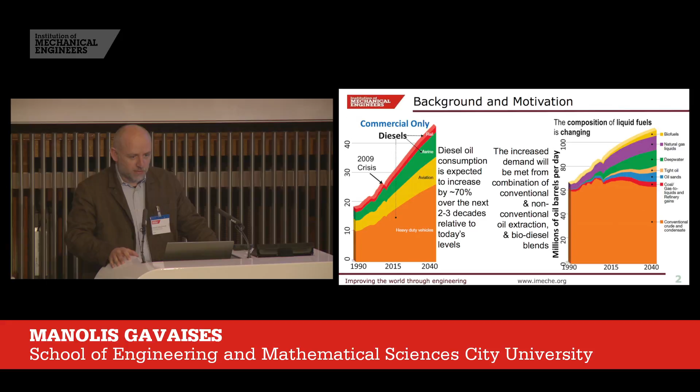Let me start with the motivation of this work, which is part of a greater plan. I guess all of us know that diesel oil consumption in the commercial sector is going to increase a lot over the next two decades. Many forecasts suggest that, and it's already an industrial reality that demand will be met from different oil sources, including conventional but less conventional ones.

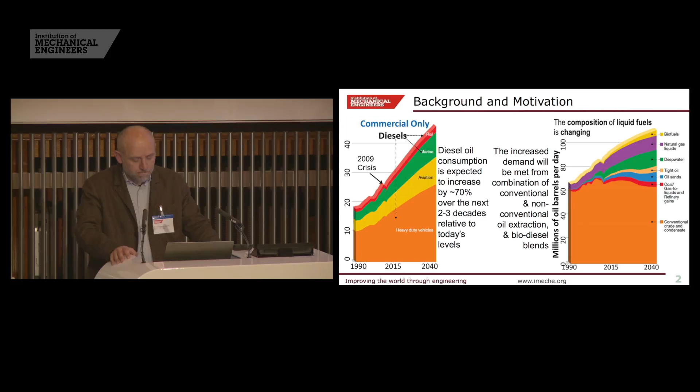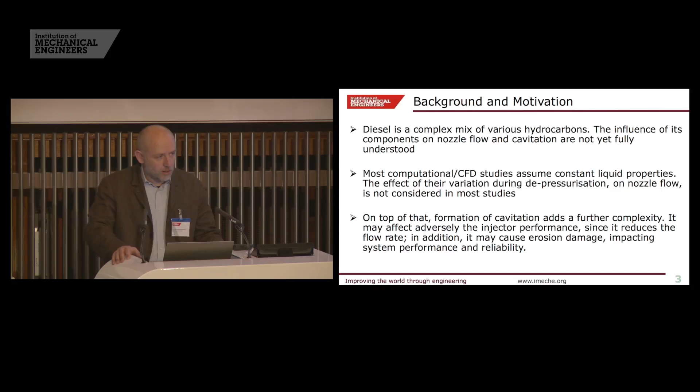That macro trend affects what we do in different ways. If we narrow down first to fuel systems, we know that various properties do affect nozzle flow and cavitation, but the actual influences are not fully understood. And if you narrow further down to computational studies, most of what we have seen so far in the literature refers to simulations where constant properties are frequently utilized without taking into consideration the variation as a function of pressure and temperature during the depressurization of the fuel as you go from the rail to the injector. On top of that, if cavitation is taking place, we know it does have an effect on flow rates and erosion and overall system performance.

So the objectives and aims of the present work are the following. First, to simulate the effect of variable fuel properties on nozzle flow and cavitation as we depressurize the fuel from the rail to the nozzle exit. Second, to investigate how different fuel components cavitate for a range of conditions, pressure and nozzle designs. And once we have quantified those effects, to compare how close or far they are from changes to the nozzle flow that can be induced by simple modifications to the nozzle design, like the tapering of the nozzle or a radius of curvature, things like that.

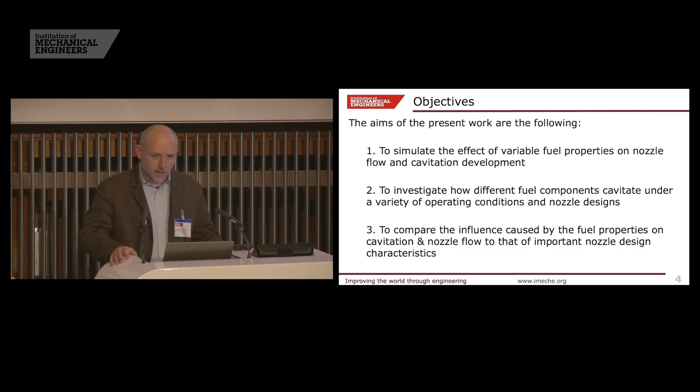This is the structure of the presentation that is going to follow. I'll give an overview of the model we have been using for this study and a description of the nozzle configuration that has been utilized. Then I'll go through the various results, which briefly cover the effect of variable fuel properties for both fixed needle lift and variable needle lift cases. I will show the effect of cavitation and the effect of fuel composition, and at the end I will summarize with concluding remarks.

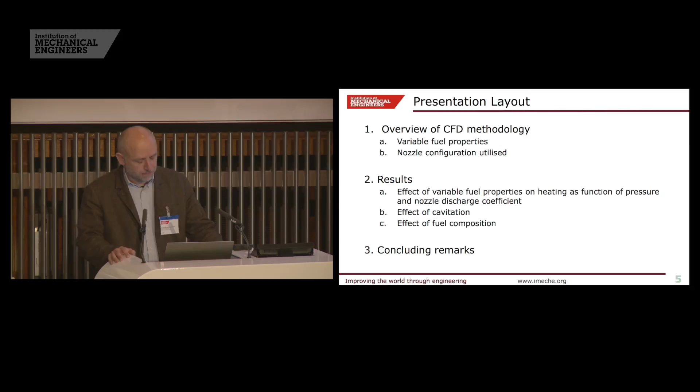I will start with a very brief introduction to the CFD methodology, similar to what my colleague Fivos Koukouvinis presented yesterday. At this stage we decided to keep things relatively simple, and in order to have a first order of magnitude comparison between the different cases, we don't consider it necessary to go to more complex LES or other simulations, so RANS runs have been adequate for this study.

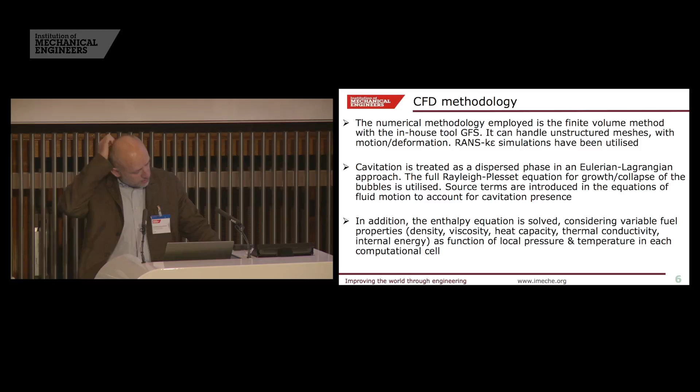Cavitation, as mentioned yesterday, is treated with a Eulerian-Lagrangian approach, where cavitation starts from pre-existing nuclei in the fluid that follow the Rayleigh-Plesset equation, and then we calculate their interaction with the flow using appropriate interaction terms in the solved equations.

In addition to those, which are kind of standard, we have introduced the enthalpy equation, which is fully coupled with the cavitation, and in which we consider variable fuel properties. Density, viscosity, heat capacity, thermal conductivity, and internal energy are all a function of the specific fuels used, and these vary throughout the solution in every single computational mesh cell as we calculate.

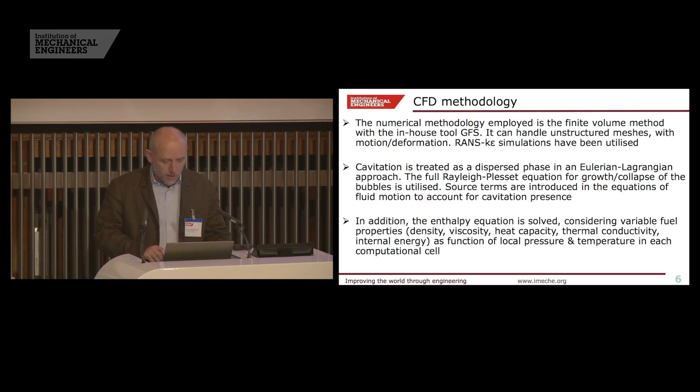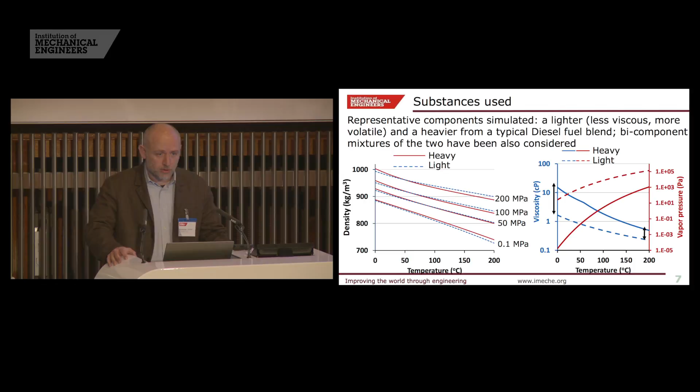In terms of the studies I'm going to present, starting from a typical 6-hole injector, we are simulating only a sector of 60 degrees, applying symmetry boundary conditions, adiabatic walls, a range of injection pressures from 1100 to 3000 bar, a fixed back pressure of 60 bar, and we also fix the fuel inlet and initialization temperatures to 80 degrees for the studies I'm going to present today.

Looking in a bit more detail at the nozzle flow itself, we are using a radius of curvature at the hole inlet, as well as straight holes and some tapering in order to have more or less cavitating flow conditions.

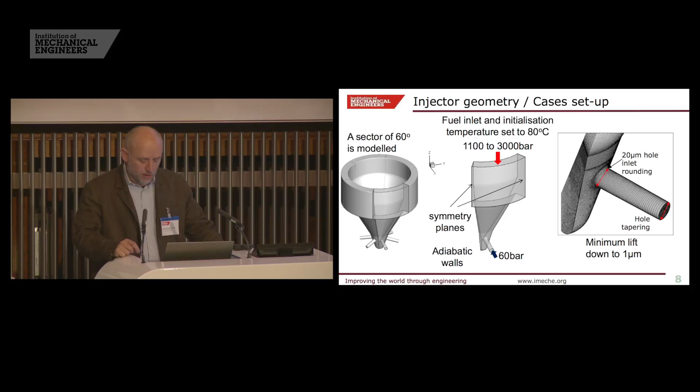I should also mention that during the transient motion of the needle, the minimum lift we applied goes down to 1 micrometer. So before getting into too much detail, that's how it looks. It's a very simple nozzle, nothing exceptional happening, not too complex flow regimes.

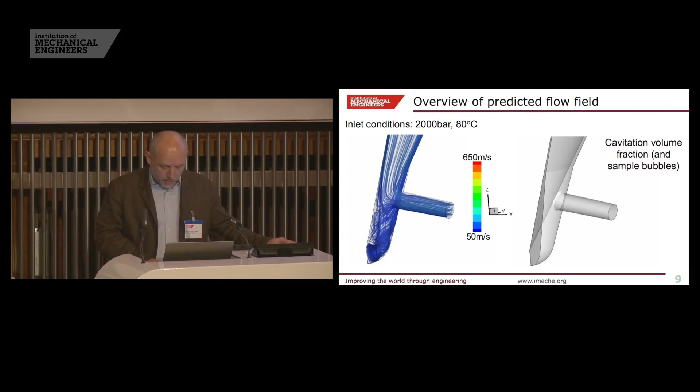The vertical axis is the temperature difference between inlet and exit. As a function of the discharge coefficient, one can calculate by simple zero-dimensional thermodynamic considerations the temperature increase of fuel. One means all pressure is converted to kinetic energy; zero means all pressure is converted to enthalpy, and from the properties you can calculate the corresponding temperature increase. The continuous lines represent simulations from a 0D model, and the superimposed points are from the CFD simulations. So once you have the properties in the solver and calculate friction, the overall heating is what you should expect from theory.

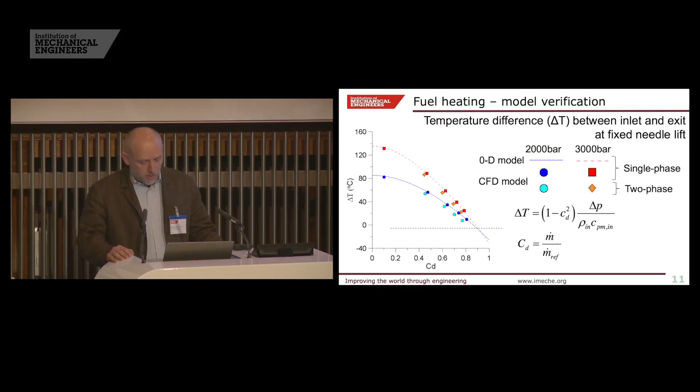Those simulations are initially performed assuming single-phase flow, and if you add cavitation on top of that, we see it does not play a significant role on the heating. You expect some interaction because the flow rate may change, but mainly that effect on heating is small.

Now let's take a step further and see how different fuel components may affect things. What I'm presenting here is the effect on fuel delivery. Starting from that reference case, the blue bars correspond to the light substance, the red to the heavy substance, normalized from 100% which corresponds to fixed properties and single-phase flow.

We know first of all that the difference in viscosity does affect the mass flow rate, and that's because of the difference in viscosity - density is more or less the same, so it's mainly a viscosity effect. Then you can apply the cavitating phase, and you find, as expected, an overall reduction in fuel delivery. All those simulations assume constant properties.

The next complexity is to add variable properties, and here we find a slightly different trend. The light component gives predictions that, relative to the reference case, show a reduction, while the heavy component has a different trend. That's a balance between the variation of density and viscosity across the range of operating pressure. So depending on which component you have, you may find a different variation there.

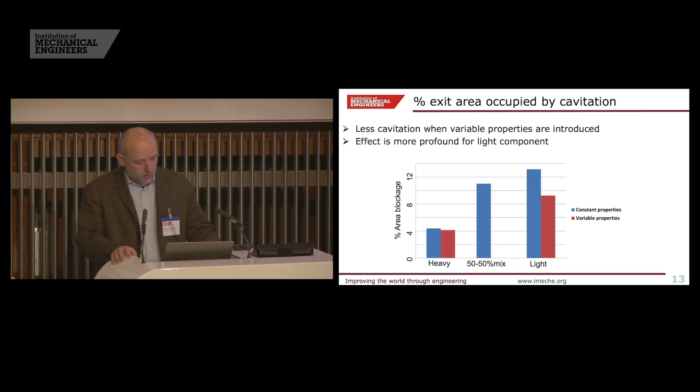Another measure of quantifying the effect of properties on nozzle cavitation is to compare, for the heavy and light fuel - which are to the left and right bars - the area at the nozzle exit occupied by cavitation. I refer to that as blockage. It effectively shows how much of the volume exiting through the nozzle is cavitation. In that case it goes up to 12%, with the remaining 88% being the liquid that comes with it.

If density was constant, that would automatically translate to a corresponding increase in injection velocity. So what we see here is that the effect of properties is more profound on the light components, and in relative terms is less when you consider variable properties.

The previous case I presented referred to fixed needle lift at a given, say, maximum value across the range. Now let's see how things may change with an actual transient needle lift profile, which is what we've assumed for these simulations - an assumption for these cases. It goes from 0 to 1 millisecond.

What I'm presenting with the two different colored lines now is the temperature increase, as I was predicting before for the fixed needle cases, but through the injection event. So the temperature increase of around 20 to 30 degrees at time around 0.8 milliseconds, which is the flat part - the maximum needle lift case - corresponds to what we had before. However, during the opening phase of the needle, we see a disproportionally large increase of fuel heating.

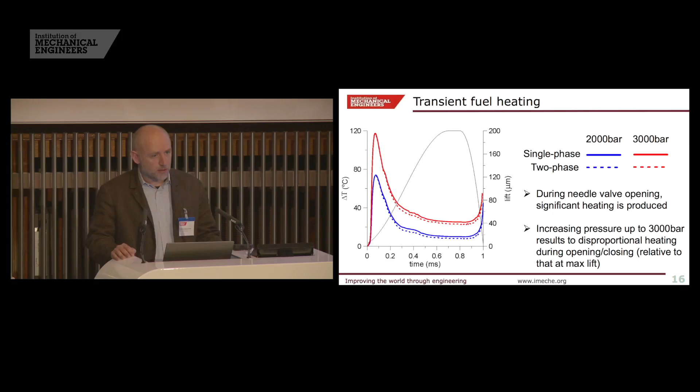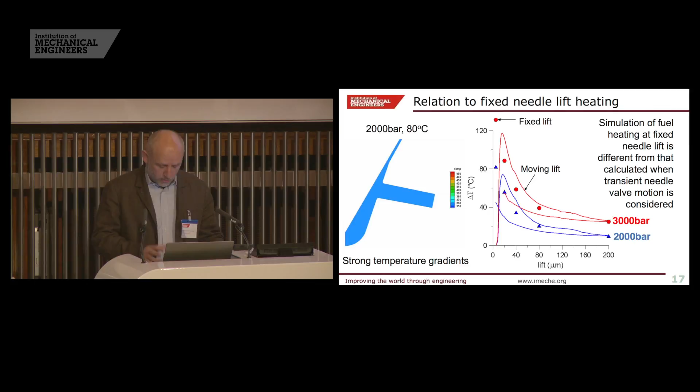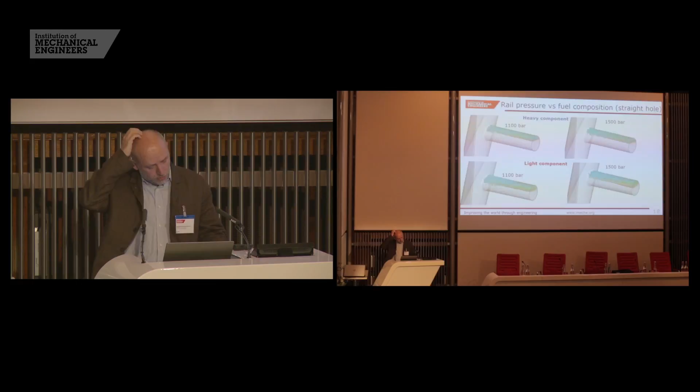Now let's see how different composition may affect the results. I'm using for these simulations some more moderate pressure values for the two different components simulated. If you were fast enough, you'd see that between the light and heavy components, cavitation was starting much faster for the higher pressure case, and going towards this direction was the slower developing one.

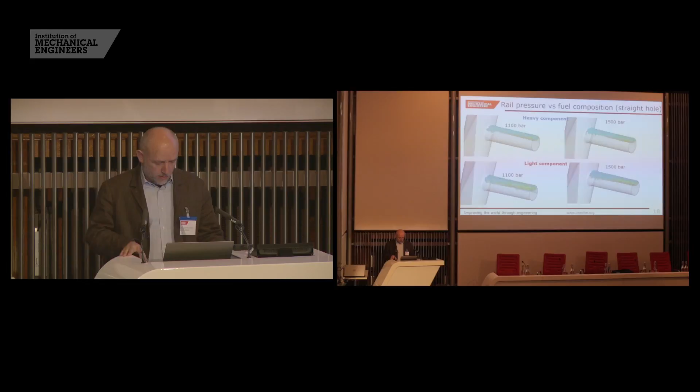So for a given fixed pressure level, 1500 bar or 1100 bar, corresponding to some pilot injection events, you see a difference in the initiation and development of cavitation growth that in relative terms corresponds to a rail pressure difference of 400 bar. You can get the same effect by adding 400 bar of pressure.

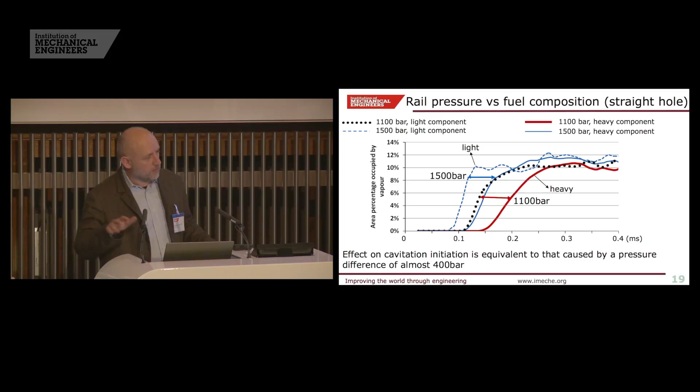Those simulations refer to a straight injection hole, and you can notice that after that initial period of cavitation initiation, all of them more or less converge to the same 10-12% value.

The next slide, the last result I'm going to present, refers to predictions for a fixed injection pressure, 1500 bar, but mixing together straight injection holes and tapered injection holes. The top curves refer to the straight cylindrical ones, and the lines below refer to the tapered.

Again, with red we have the heavy component. The line to the right is the tapered nozzle with heavy fuel, the slower one with less cavitation. The other extreme is the straight hole with light fuel.

You can see that the same trend presented in the previous slide is also apparent in the tapered nozzle. What's also interesting is that on top of those simulations, we added some cases.

In which we introduced to the heavy fuel a small percentage, say 1%, of the light one. Because it's volatile, that's the one that cavitates. You can see that the lines that were initially red have become green, which are very close to the behavior of the light fuel.

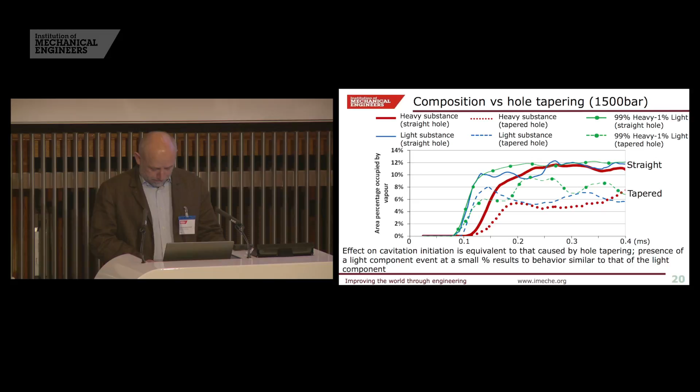So summarizing, I presented results which considered variable fuel properties in simulations for nozzle flows and captured the heating effects. We found that the prediction of fuel delivery, once you are a CFD engineer and want to know how much is injected, is strongly affected by those assumptions made in the simulations.

We found that cavitation inception for lighter fuel components is faster, and it changes as a function of the needle opening and closing time. The time scale of this event is comparable to valve opening, about 0.1 millisecond, which for today's trends is equivalent to what it takes for a needle valve to open.

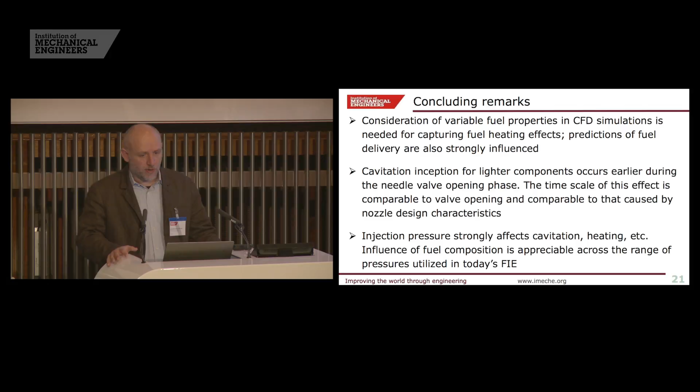We also found that there is comparable variation in the total amount of cavitation that can be produced by changing the hole tapering or the nozzle hole radius of curvature at the inlet, which I haven't presented but we know affects the results in a similar manner. We also demonstrated that injection pressure affects cavitation, and the variation of fuel properties has an effect across the range of values tested. So I will close with that, and thank you for your attention.